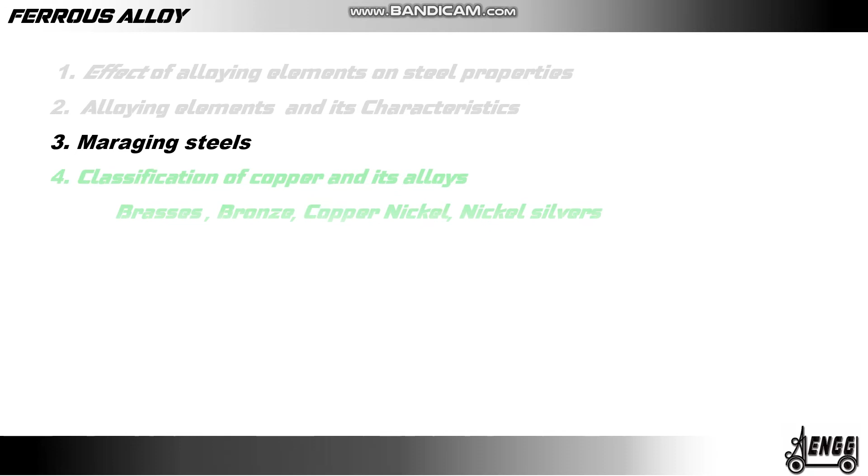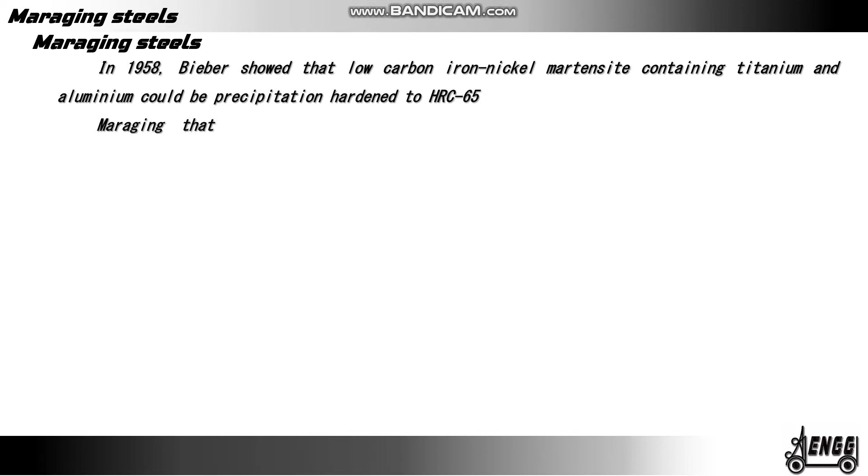Today, let us discuss in detail about maraging steels. Under ferrous alloys, we have covered two topics; this is the third one that comes under that. In 1958, Bieber showed that low carbon iron-nickel martensite containing titanium and aluminum could be precipitation hardened to HRC 65. Maraging steels are known for possessing superior strength and toughness without losing ductility.

The principal alloying element is 15 to 25 weight percentage of nickel. Maraging steels are carbon-free iron-nickel alloys with additions of cobalt, molybdenum, titanium and aluminum. The term maraging is derived from the strengthening mechanism, which is transforming the alloy to martensite with subsequent age hardening. With yield strength between 1400 and 2400 megapascal, maraging steels belong to the category of ultra high strength materials.

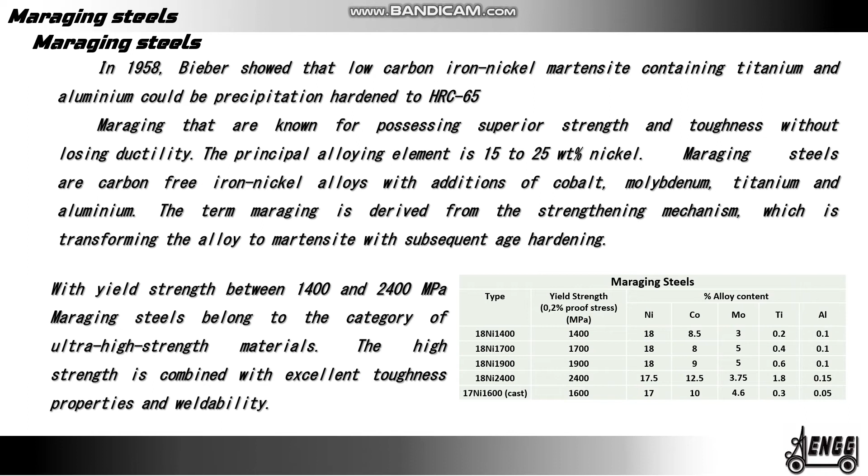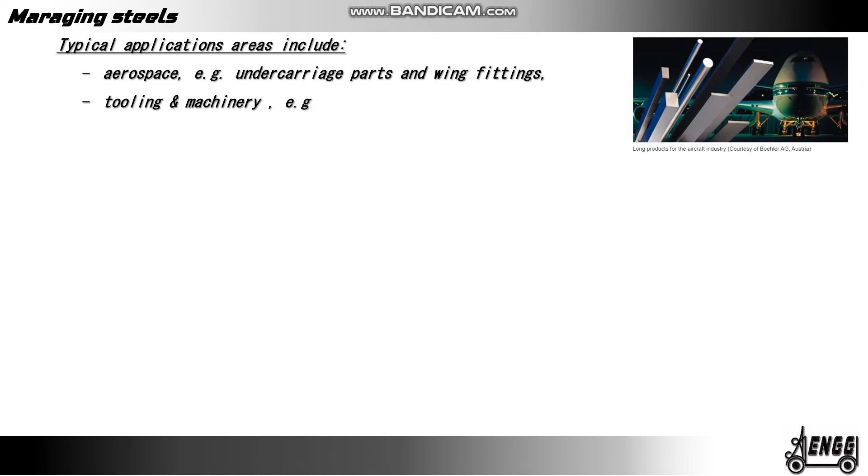The high strength is combined with excellent toughness properties and weldability. In the table we can see the different types of maraging steels, their yield strength and percentage of alloy content. Typical application areas include aerospace, for example undercarriage parts and wing fittings, tooling and machinery, for example extrusion press rams and mandrels, tube production, gears, ordnance components and fasteners.

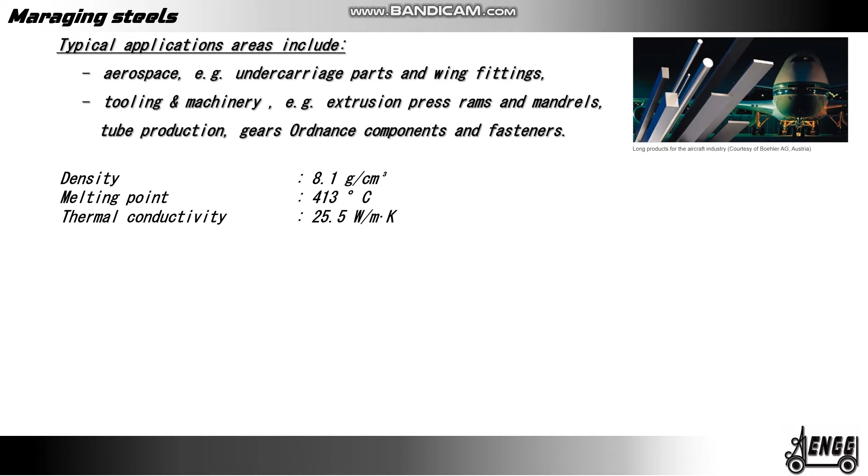The properties of maraging steels are: density 8.1 gram per centimeter cube, thermal conductivity 25.5, yield tensile strength typically 1400 to 2400, ultimate tensile strength typically 1.6 to 2.5, elongation at break up to 15%, Young's modulus 210, shear modulus 77, bulk modulus 140, hardness 50 HRC grade 250, 54 HRC grade 300, 58 HRC grade 350. Mean coefficient of thermal expansion 11.3 into 10 raised to minus 6.

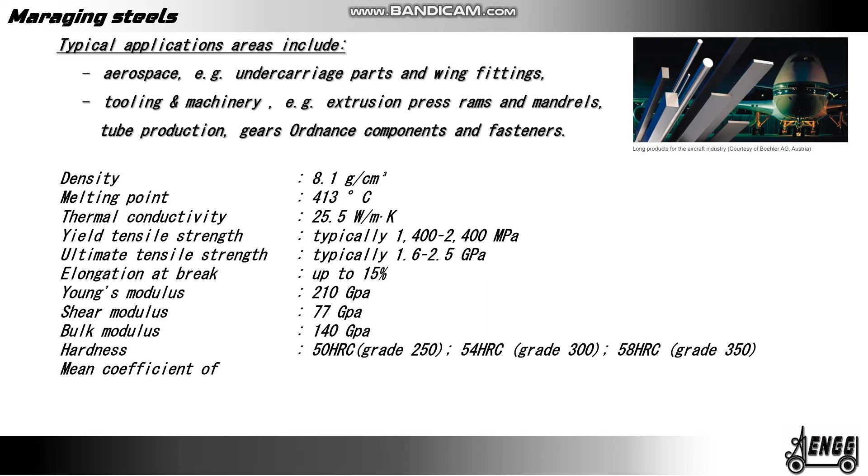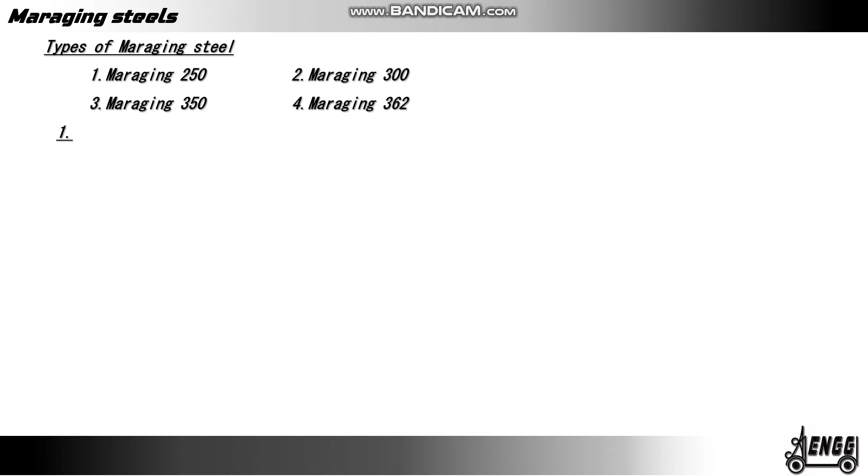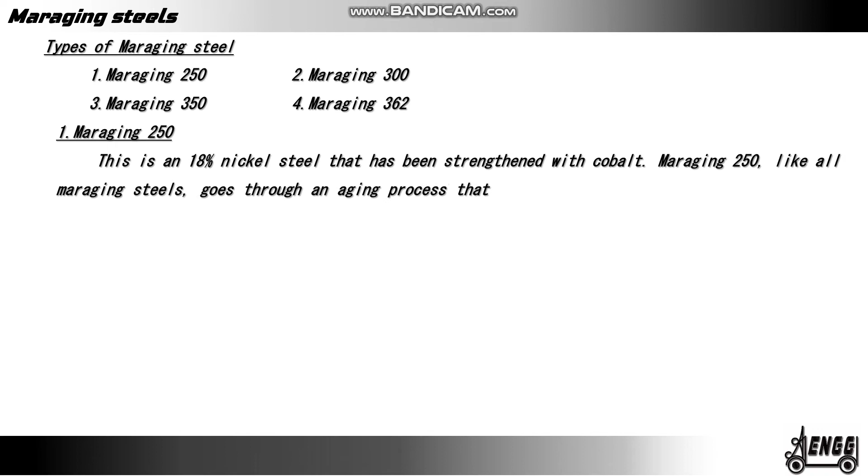Types of maraging steels: 1. Maraging 250, 2. Maraging 300, 3. Maraging 350, 4. Maraging 362. 1. Maraging 250. This is an 18% nickel steel that has been strengthened with cobalt. Maraging 250, like all maraging steels, goes through an aging process that forces the metal to cool from its molten state to its solid state over an artificially long time. This process results in a tempered steel that has both high levels of strength and hardness.

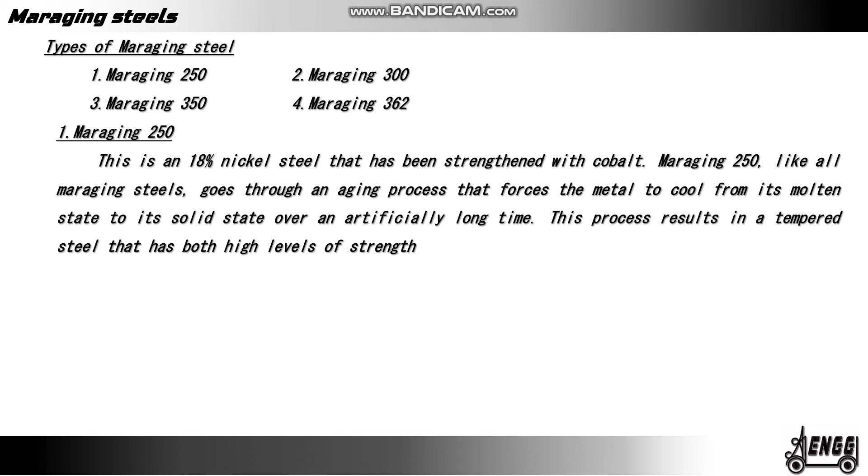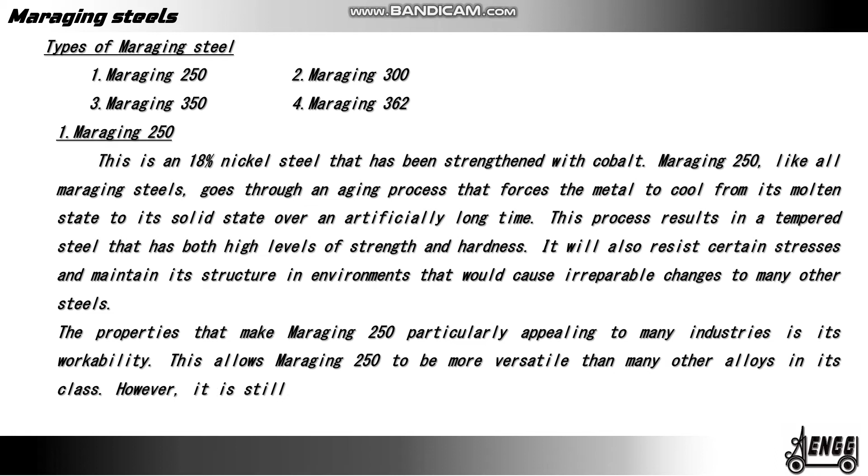It will also resist certain stresses and maintain its structure in environments that cause irreparable changes to many other steels. The property that makes maraging 250 particularly appealing to many industries is its workability. This allows maraging 250 to be more versatile than many other alloys in its class. However, it is still the alloy's strength and resistance to extreme temperature that make it a truly effective material in a wide range of atmospheres.

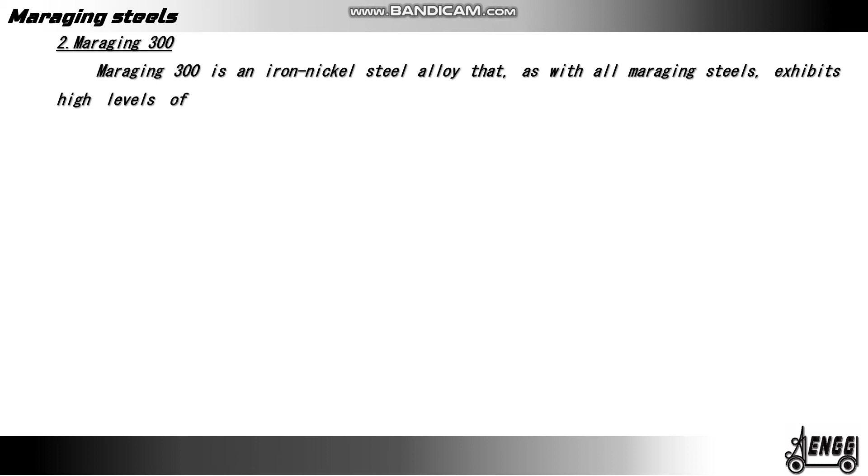2. Maraging 300. Maraging 300 is an iron-nickel steel alloy that, as with all maraging steels, exhibits high levels of strength and hardness. However, maraging 300 also possesses an extreme resistance to crack propagation, even in the most extreme environments. Maraging 300 is often used in applications where high fracture toughness is required or where dimensional changes have to remain at a minimal level.

The unique properties of maraging 300 have made it an integral part of the aircraft and aerospace industry. It is often used in rocket motor casings and the landing gear for certain planes. Maraging 300 is also effective in the design of power shafts and low temperature cooling systems.

3. Maraging 350. Maraging 350 refers to a crystalline tempered steel martensite that is created through an aging process. When aging is used, steel is forced to cool from its molten state to its solid state over a prolonged period of time. The result is a metal that is harder and stronger than it would be had the steel been allowed to cool at a natural rate.

Maraging 350 is an alloy that has become an integral material in the airplane and aerospace industry. Due to its strength and its ability to withstand extreme conditions, including frequent and sudden changes in speed and temperature, maraging 350 is used in the production of rocket motor cases, takeoff and landing gears, and certain munitions created by defense companies. Maraging 350 also has uses in less drastic applications such as die casting and high-performing shafting.

4. Maraging 362. Maraging materials are known for their exceptional strength and hardness. Their ability to resist various forms of stress in extreme environments has made maraging steels commonplace in the aerospace and aircraft industries. Each maraging alloy has its own unique qualities, but many of them are used in similar applications. Maraging 362, like other maraging steels, undergoes an artificial aging process. This process leads to the material's added strength and hardness.